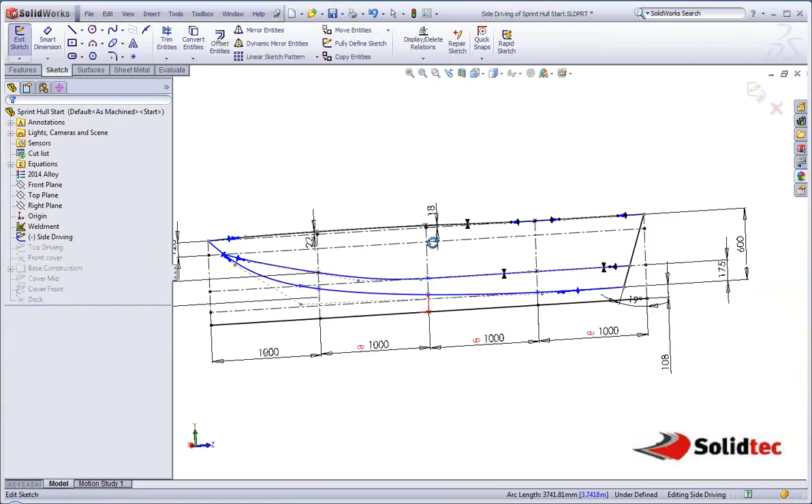This is going to be a short demonstration of how to build a jet boat using multi-body sheet metal. As you can see, I've already pre-drawn some sketches. I have one sketch that shows the side profile and the transition between the hull and the side, and a profile at the bottom that shows the plan view. These can be used to drive the entire structure once complete.

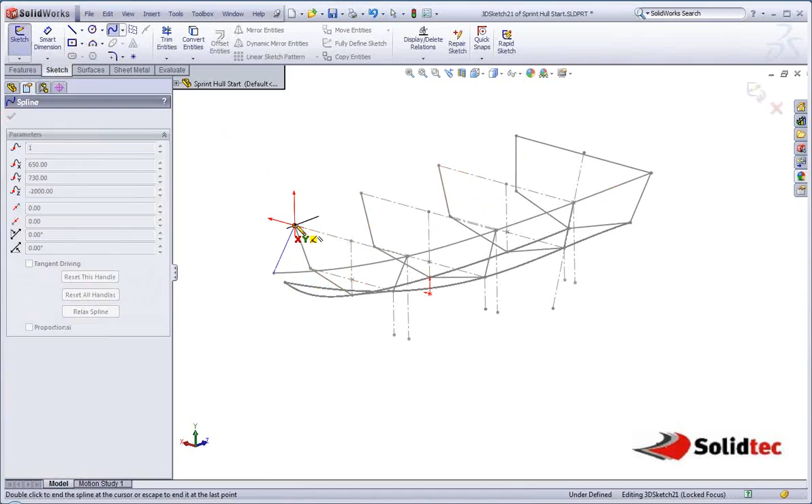These were used to create a series of other 2D sketches. As you can see, these intersect between the two points on the sketches, and a 3D sketch was drawn in the same fashion to link up the corners, which I'm going to do now, and the same through the side here. So very simple to create this type of geometry.

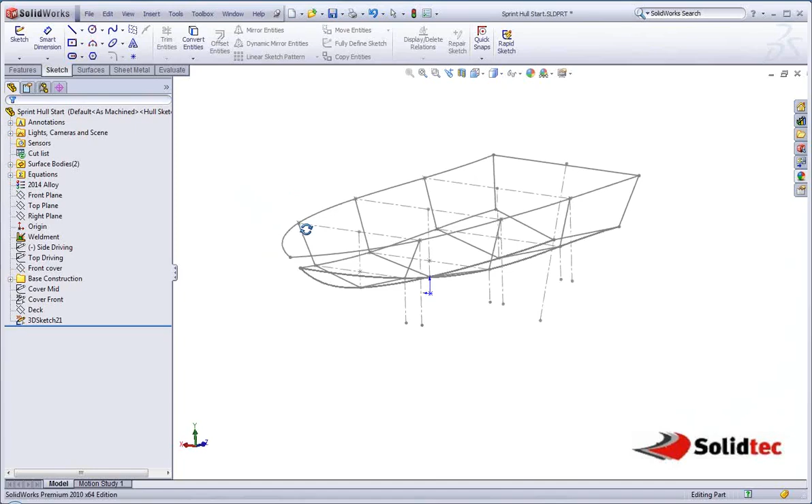The next thing we're going to use is to draw the sides of the boat. As you can see, because I've mirrored these, we don't necessarily need to use those, but we're going to draw with one half and mirror the features across, taking advantage of that symmetry.

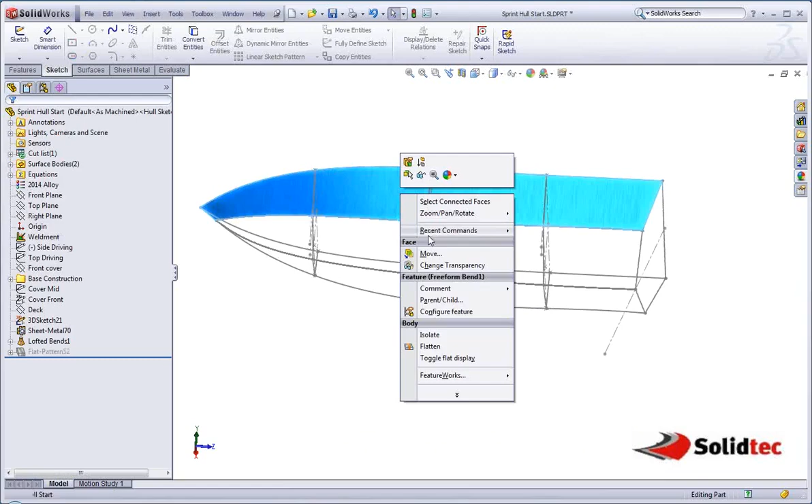And we're going to use a feature called lofted bends. What this lets us do is create a sheet metal part that can flatten complex curvature. As you can see, we get the side of the hull here, and we can right-click and flatten it at any point. We can see a full flat pattern and save that as a DXF for profile cutting.

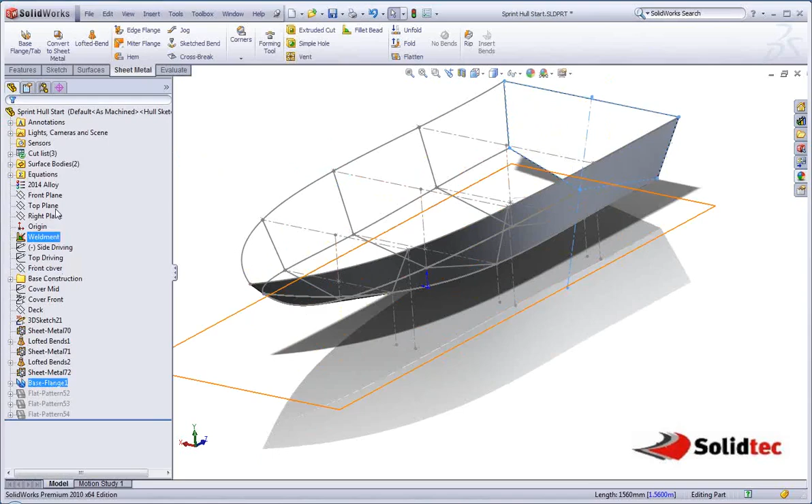We're going to use the same command again to get the hull done, and again we're going to put that on the outside. Then we're going to use a standard sheet metal command, base flange, 6mm for the transom at the back. As you can see, we're building up multiple bodies inside of a cut list, each with its own flat pattern, and we can flatten any of those at any time.

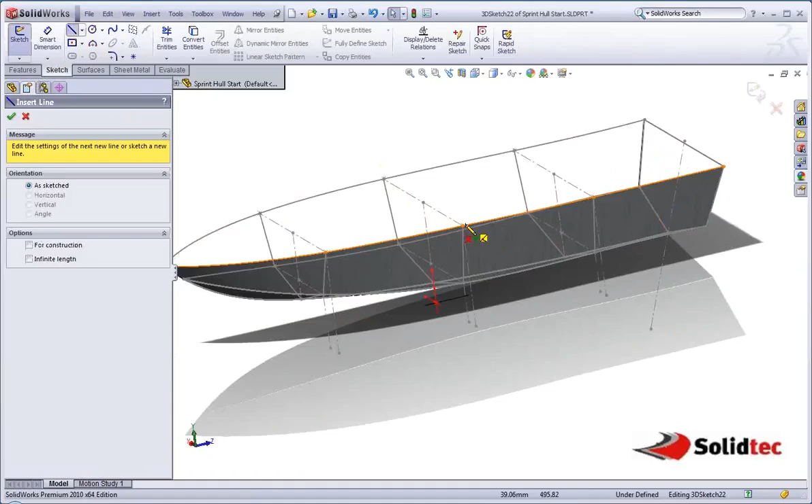Now we have that, what we're going to do next is draw the rim around the back. Before we go too far, I'm just going to create another 3D sketch, and this time we're going to connect that to the inside line here and to each of these points as we go around.

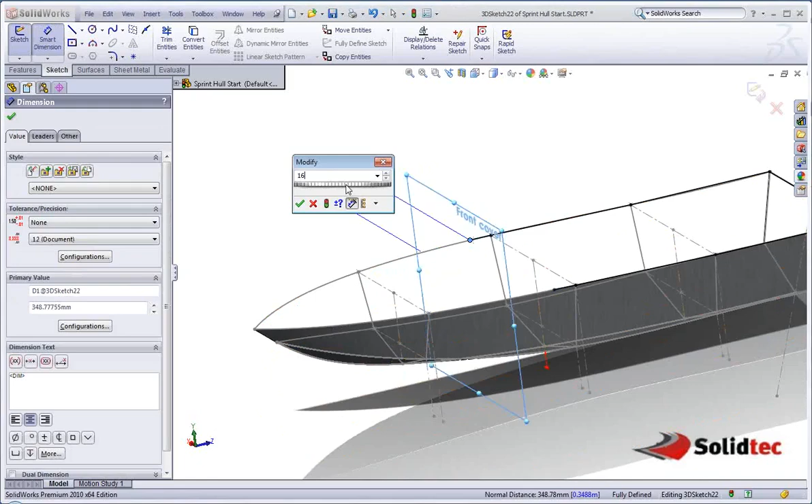And this one here, what we're going to do is actually select the mid-plane and say that it's symmetric about that right plane. One more thing, we're just going to dimension that to the front cover plane that we put in there, so we know how far back from the nose cover it's going to be.

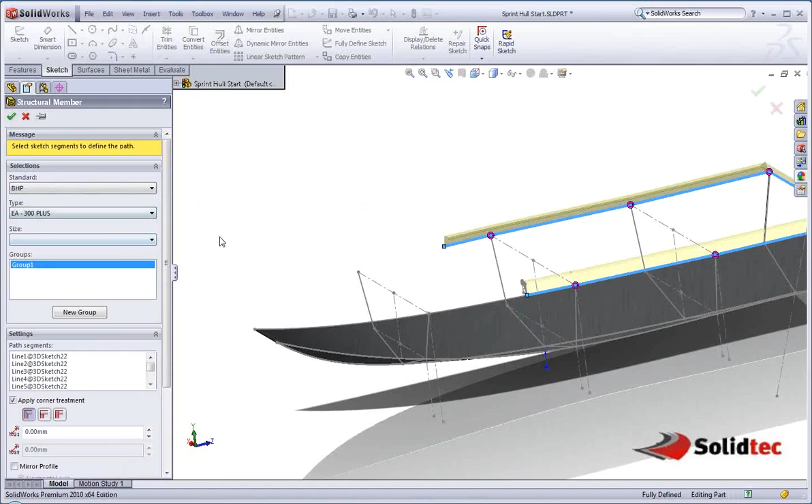I'm just going to hide that sketch we did, and we're going to select this chain, and we're going to use another tool called a structural member. This allows me to choose from a number of different standards, like circular hollow section, equal angle, any different size, like 200 by 200. Obviously that's an excessive side angle.

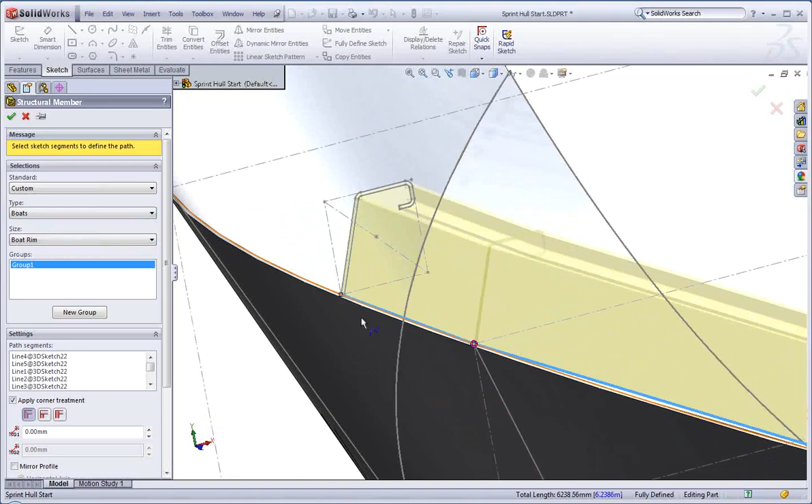I can rotate this, align it anywhere I want. What I've done is pre-drawn a profile and saved this in my boat library called a boat rim, and you can see here that it illustrates the shape of the rim. What we're going to do is click the locate button, and we can locate that on any point. Just pull this across, and I can locate it on any of these other points, rotate it, change it, choose how they join.

Do they butt weld? Do they mitre? And what we end up with is a series of structural members all the way around.

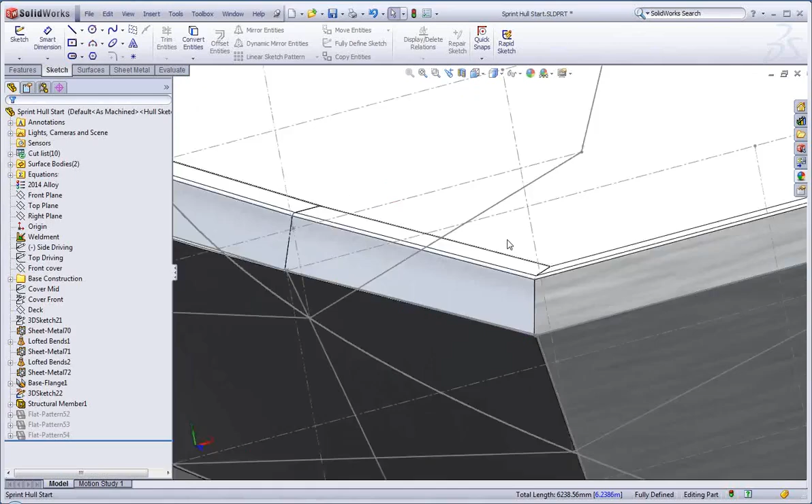Next, what we're going to do is the belting at the front of the boat. As you can see, what I've done, I've actually swept a surface that slowly rotates around through here. I did that so I could get this edge to include the later sketches from.

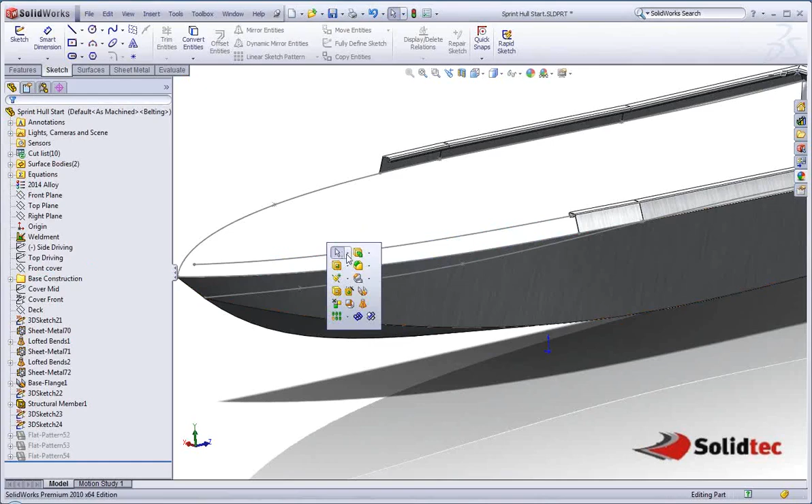But what we're going to do is use a command called face curves, and that lets me just put a couple of curves onto there. So again, I can use my lofted bend command to go between the two. Again, I'm going to make that on the outside, and this one's going to be 3mm, the same as the others.

Okay, so that's all my main bodies done. What we're going to do next is mirror those, taking advantage of the symmetry of the boat. I'm going to come down, use the right plane, and mirror. We could mirror all the bodies, but for best practice it's best to do one at a time, so I'm going to start with the hull.

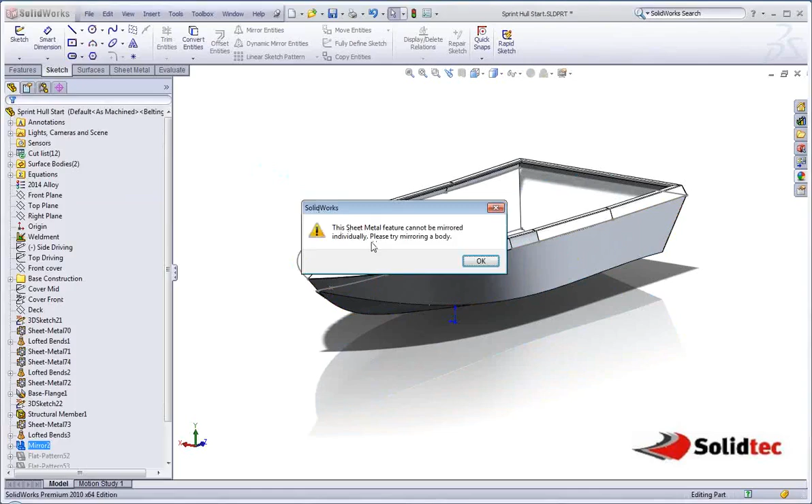Then we're going to redo that command, and we're going to do the side, and again for the belting.

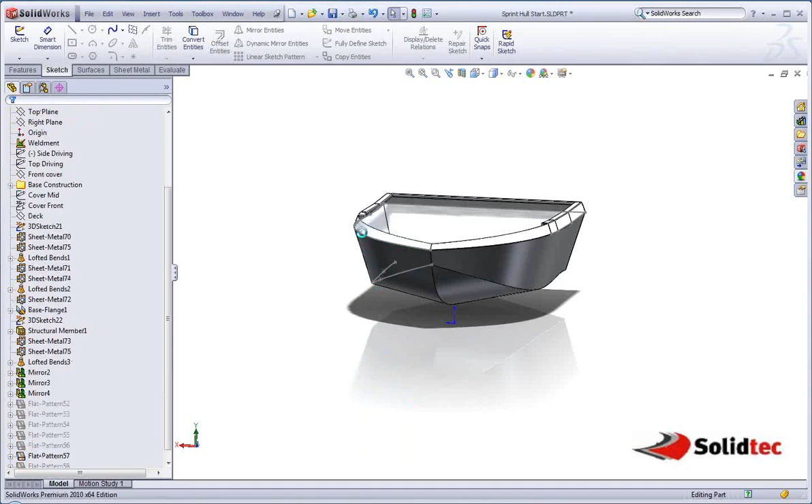Okay, so that's our boat starting to come together. As you can see, all of these are able to flatten. We can look at them in their flattened state, go through and check them, and they will update and change as we change the geometry later.

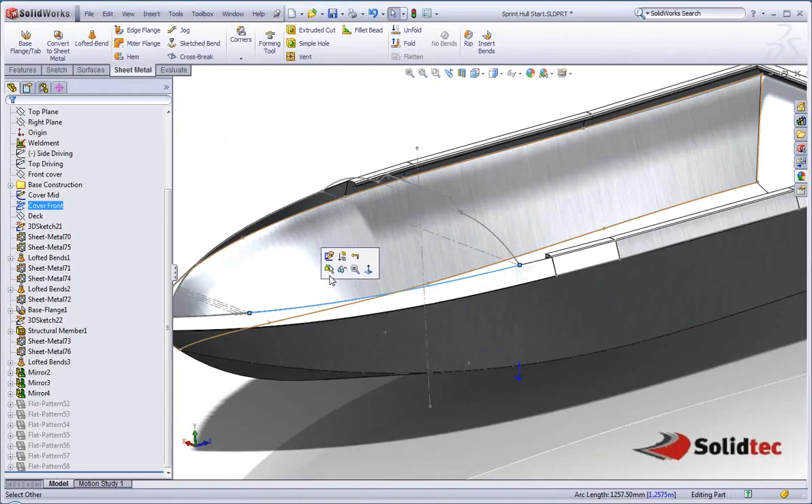So let's come through. What we're going to do next is the top nose cover. As you can see, I've pre-drawn this curve, and this sketch here is another 3D sketch. All I've done is included that edge from the swept surface I did, and done a few splits in there. This way I can control how this little kink comes down and where it joins at the nose, controlled using these dimensions here.

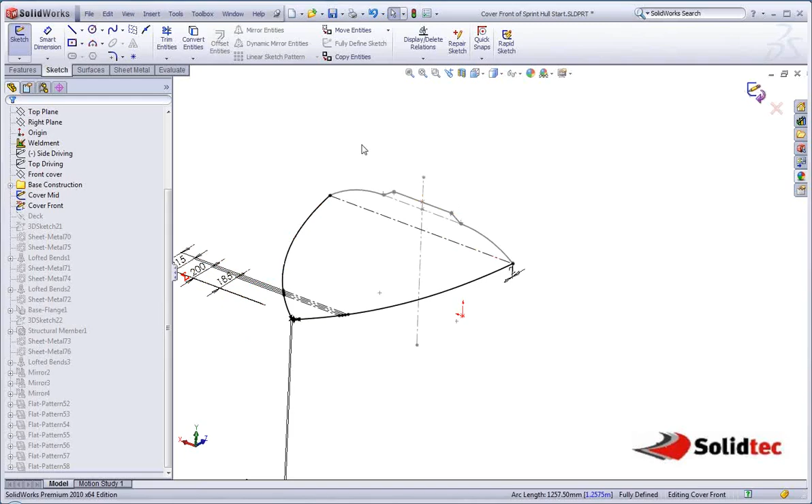Okay, so again our lofted bend command will allow us to loft between those complex forms. I'm going to put that on the outside, and that's done. So I'm just going to hide these sketches.

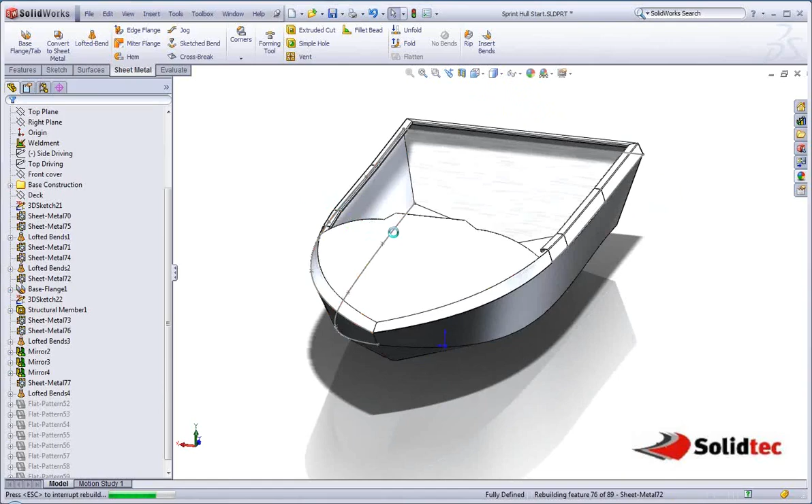Let's hide that one as well, and that one. So we're starting to get that form together quite quickly.

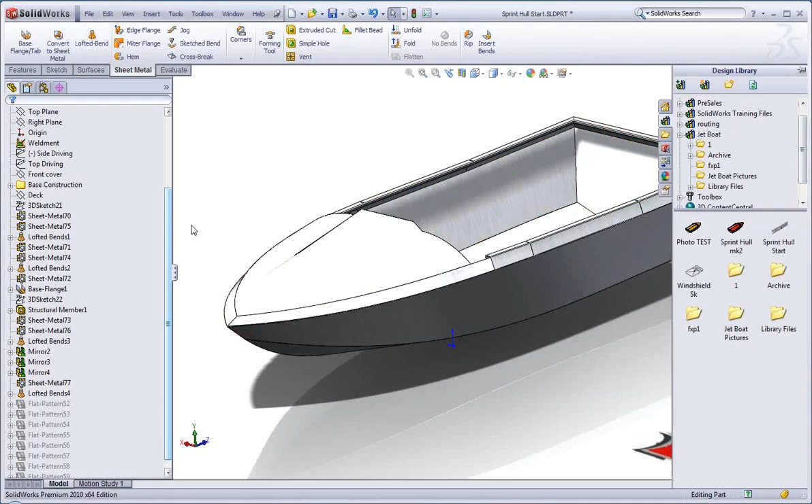What we're going to do next is the windshield. Instead of pre-drawing or drawing the sketches, I've saved those out into a library to show us how we can pull those in straight from the library. See on here that I've got a windshield sketch.

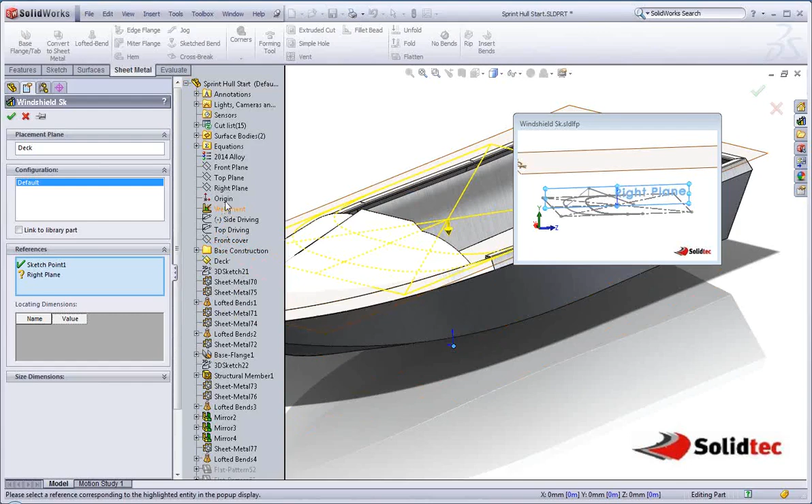I've saved a series of 3 different sketches that allow me to define where this windshield goes. What it's looking for is orientation of the point and my right plane, my center plane.

You can see what we get is a side profile showing the windshield, where it's going to be from the side on, and a top view of the windshield as well. And we're going to edit this sketch.

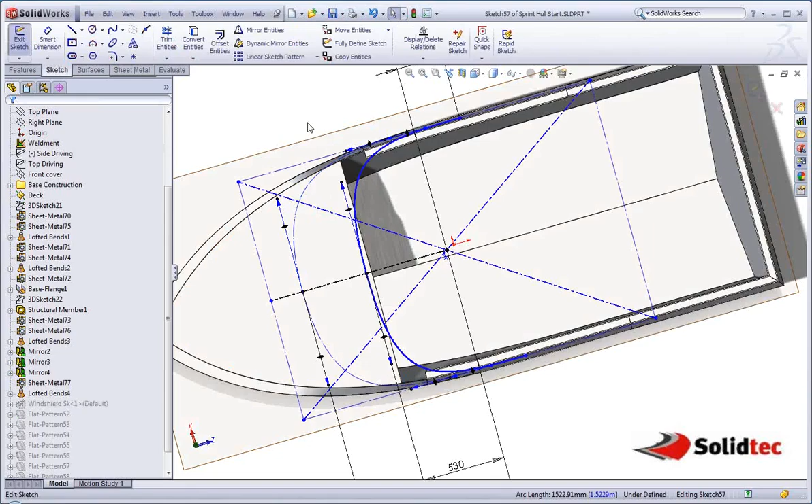We can see on here that it's not yet been defined, and we can pull that around and drag it and change it until it matches what we're after. Pop that on that point, and this looks pretty good to me of how we're going to do that.

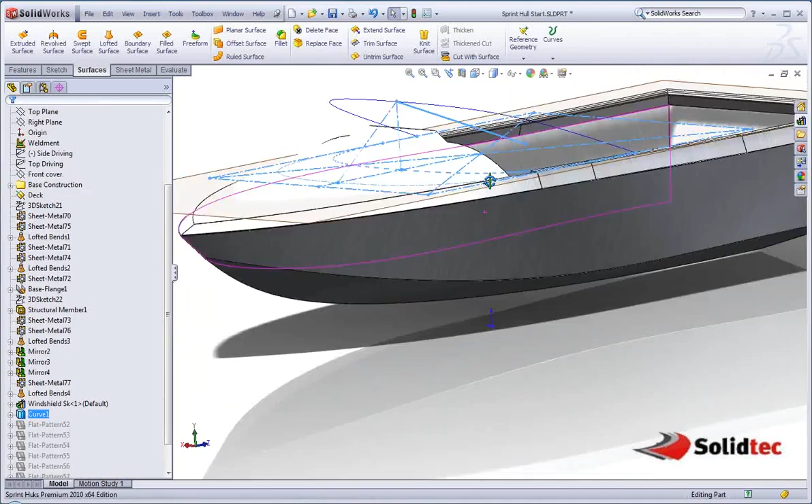Okay, so what we're going to do now - we have a top view and a side view of how we want the windshield to look - is use a tool called a project curve, and project this sketch onto this sketch. What we get is a 3D curve that shows where those intersect each other, from my side and top views.

As you'll see in the feature that we imported, I can show the bottom, and we can hide the other 2 sketches that we don't want. So we're left with a curve and a 3D sketch showing where we want, again, our lofted bends.

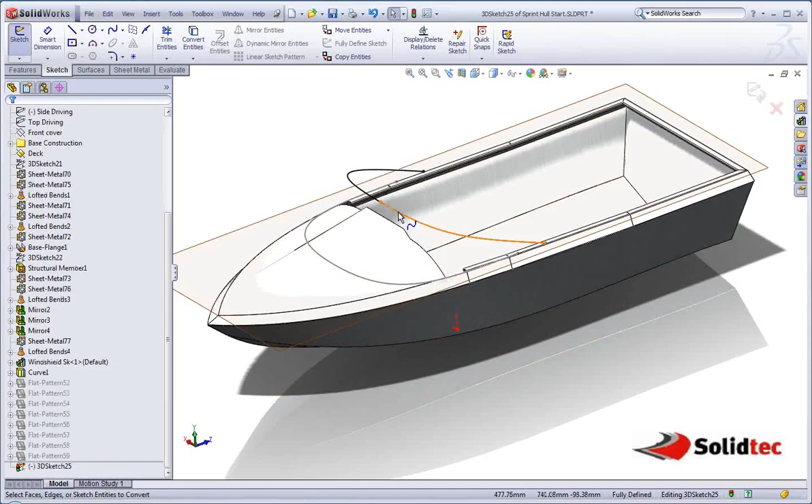So all that's left to do is create a 3-dimensional sketch. I'm going to include this particular line here, and as you can see, it's actually divided into 2 because of the way it was drawn. If I do my lofted bends from here, we'll end up with a line that shows that intersection point there on my geometry, and I don't want that.

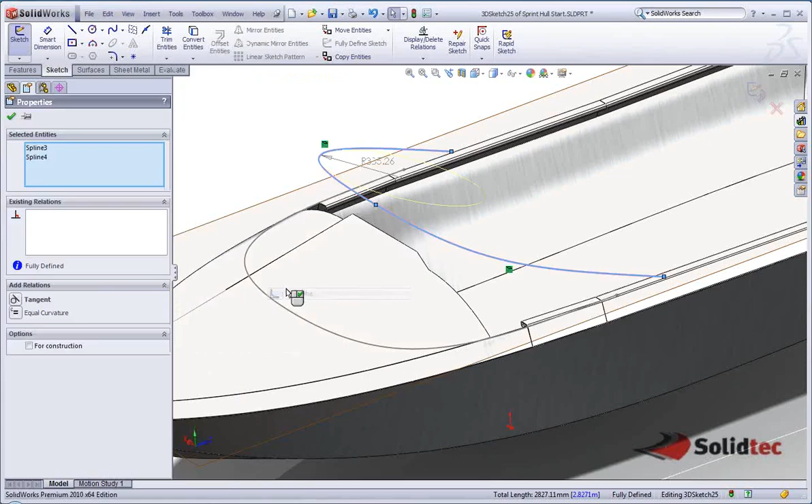So I'm going to use a little technique which is using something called a spline tool, a fit spline, and it will fit a perfectly smooth curve to those intersections.

Then I am free to use my lofted bend command between that sketch and this sketch. Again, I'm going to put that on the outside, and we end up with a flattenable windshield.

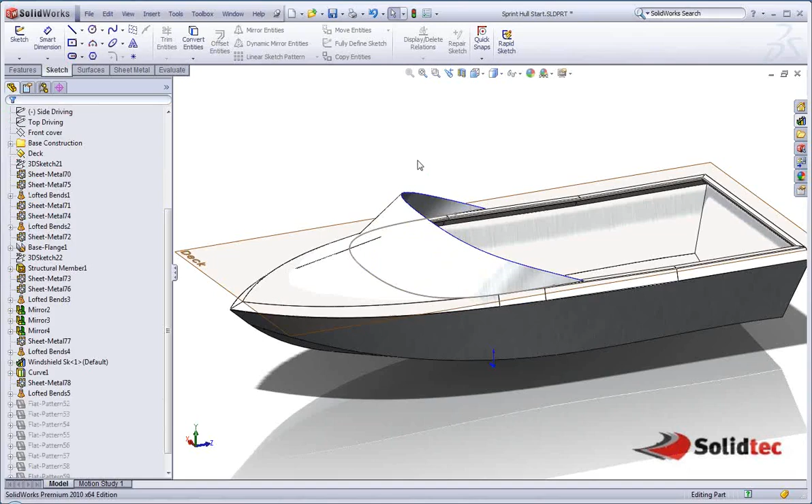Let's hide those sketches and that curve at the top. Okay, so you can see it actually penetrates through that top cover now. But what we want to do is, I'm just going to change the scene on here so it just looks a little bit easier on the eyes.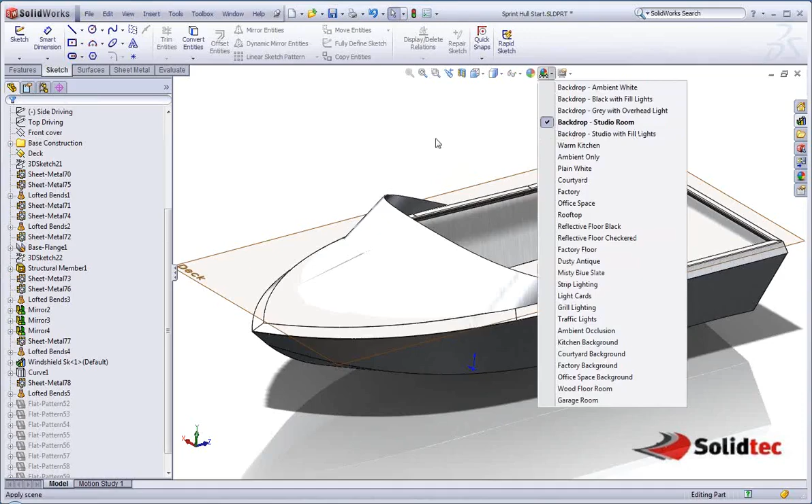You can see that we don't want it penetrating through here, so we're going to use another technique called intersection curves. I can say this surface and this surface, and what I want is a curve where they intersect each other, and that can be used to slice the bottom of the windshield off.

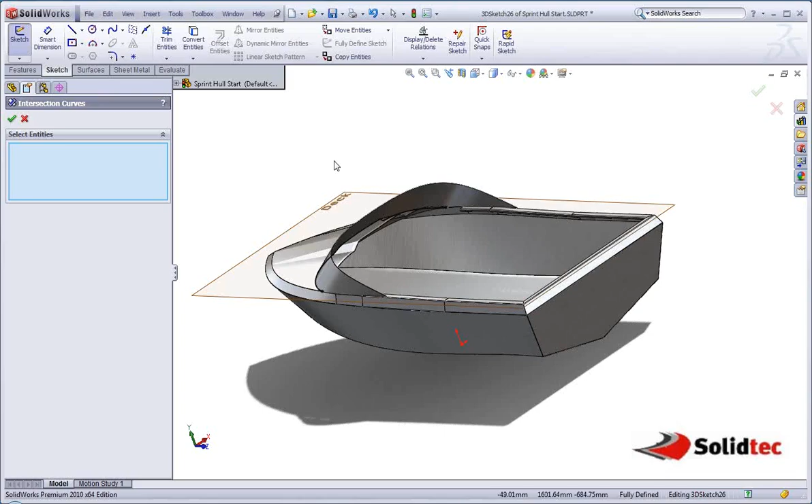Okay, so we end up with a curve like this, and all I need to do is add on there a couple of lines just to make sure that it cuts all the way through. And we're going to use an extrude cut, and we're going to cut away only the windshield.

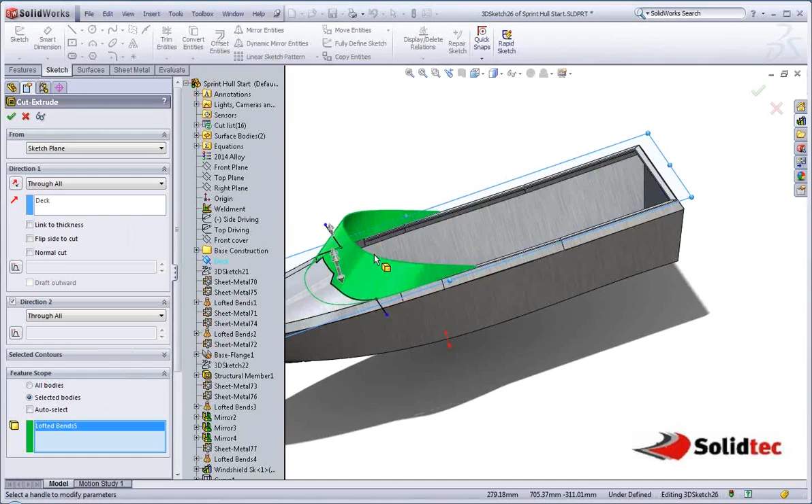Oops. Let me just come back in here and select that properly. Okay.

So what we end up with then is it fits perfectly in just on the top. So already profile to profile cut, we can see that the flat pattern of that works brilliantly.

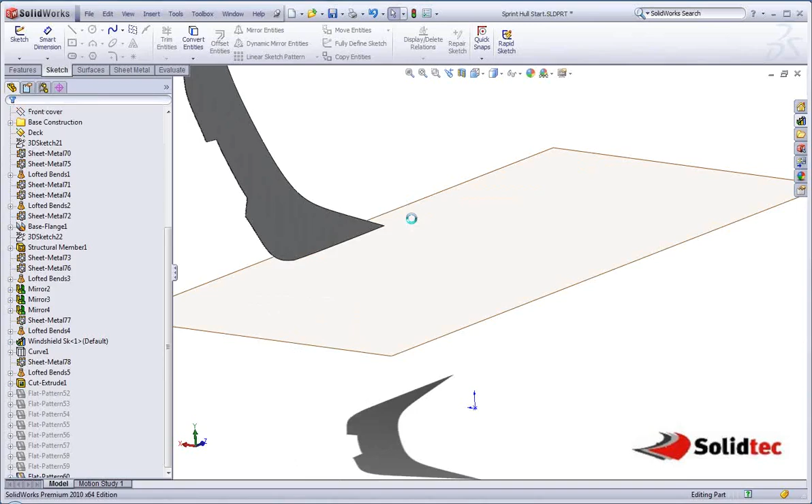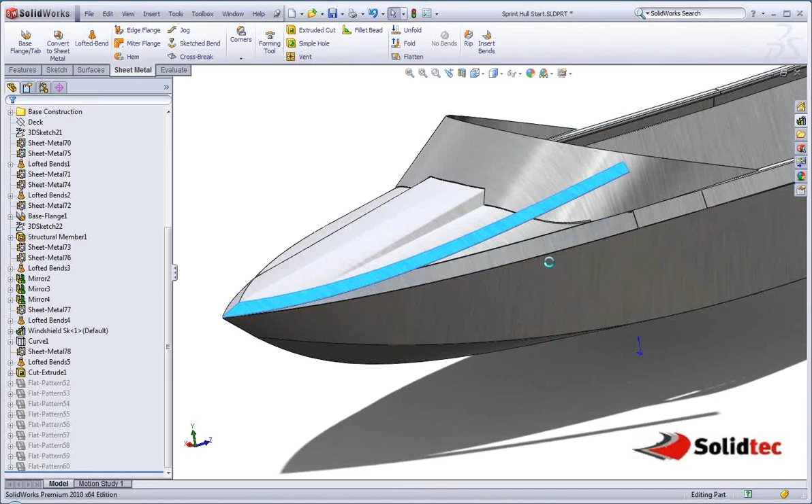And we can also work with these flat patterns in a state that's called toggle flat pattern display. This allows me to see what it looks like while we're working with it. So I can see potentially this would be how I weld this particular belting on. I'll start from here and slowly tack it round until it reached where I wanted.

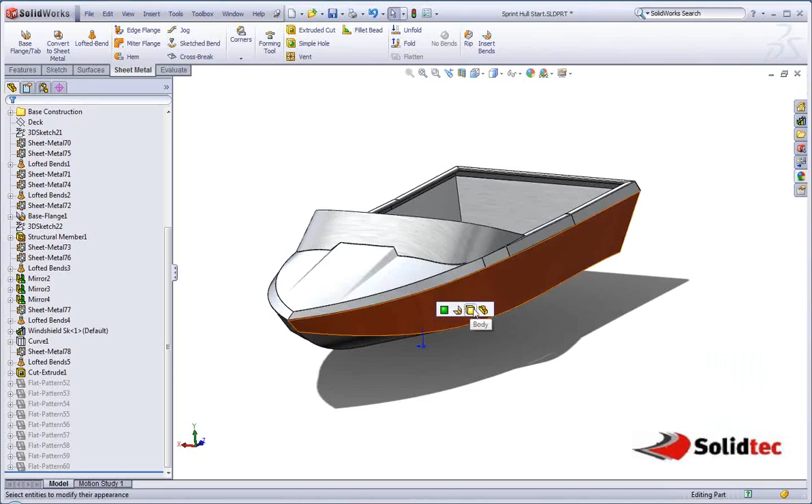Okay, I'm just going to add a couple of appearances to this, like a color to the whole body, and then maybe just this windshield can be black, and we end up with our boat. At this point we're going to save it.

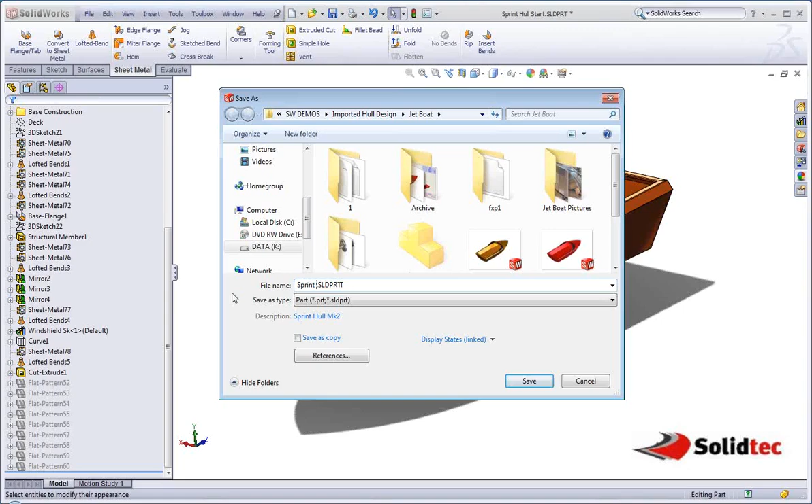I'm going to call it Sprint Hull Demo.

And we're going to do a couple of things. The first thing we're going to do is update our cut list, and we're just going to make sure that all the descriptions that we want come through to our model.

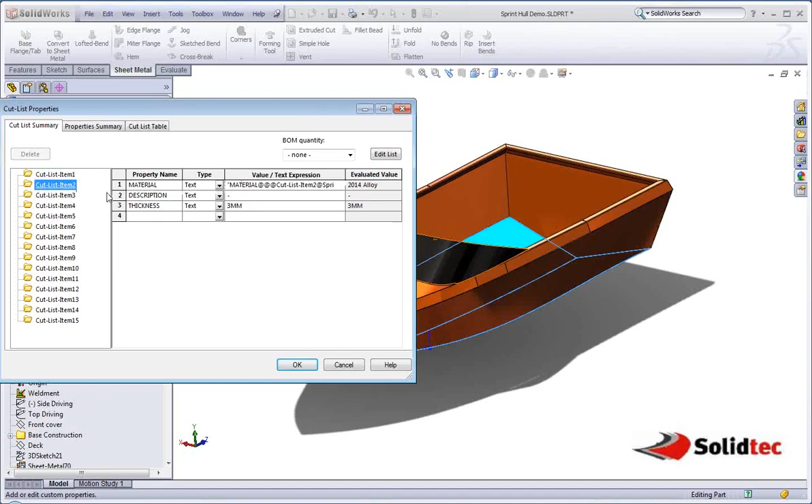So you'll see through here we've got each of the cut lists, so we can see our side in here, which is going to be side body, or port side even. I'll do it all in caps, port side. I'm pretty sure this one is going to be the port hull.

Transom, which is going to be 6 millimeters.

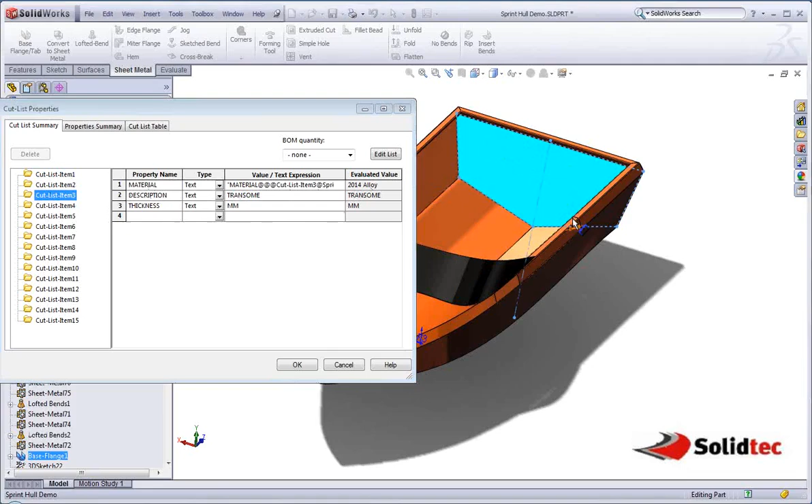And I'd like to note on here we can also get this to link to the thickness of our structure. That way when we update the thickness it will come through at the same time, and we'll see each of these comes through just fine.

Until we get down to our port belting. Starboard side. Oops. And our windshield.

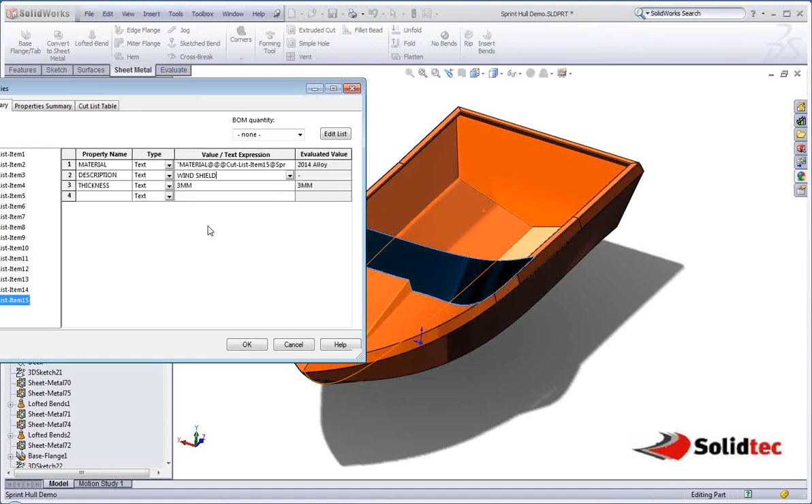Okay, so there we have our properties set up. That way when we put a cut list or a bill of materials in our drawing, they will come through automatically. What I'm going to do on top of that is we're just going to create a couple of configurations.

To make creation of flat patterns in the drawing a little simpler and easier, we're just going to do a port side and port hull, and I think maybe we'll just do the windshield as well, and one more, we'll just do that top cover. Okay, since those two go together.

And what we're going to do, we're going to take those and configure them to create some configurations. In there we're going to basically say I want a port side, a port hull, a top cover, and a windshield.

Okay, and in there all we need to do is say, well, these are going to be suppressed for these particular configurations.

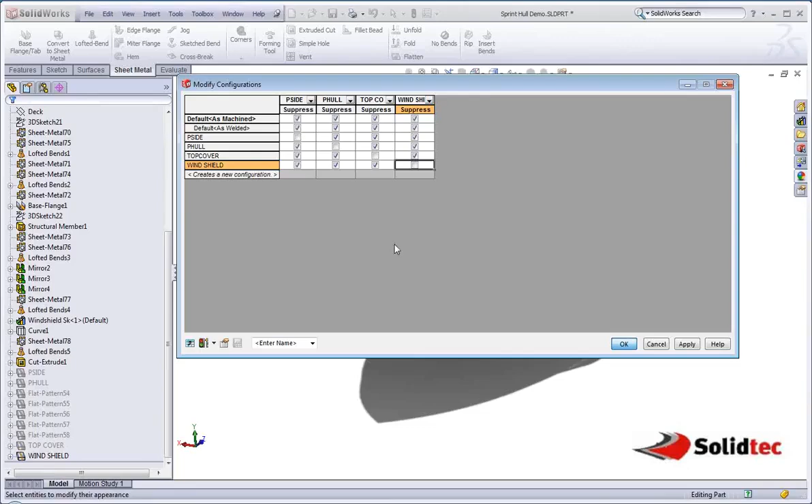As you can see, what we've done, we've built a configuration that shows the flat pattern for each of those particular components. So there's our hull, you can see we've made flat, our port side, our top cover, and our windshield.

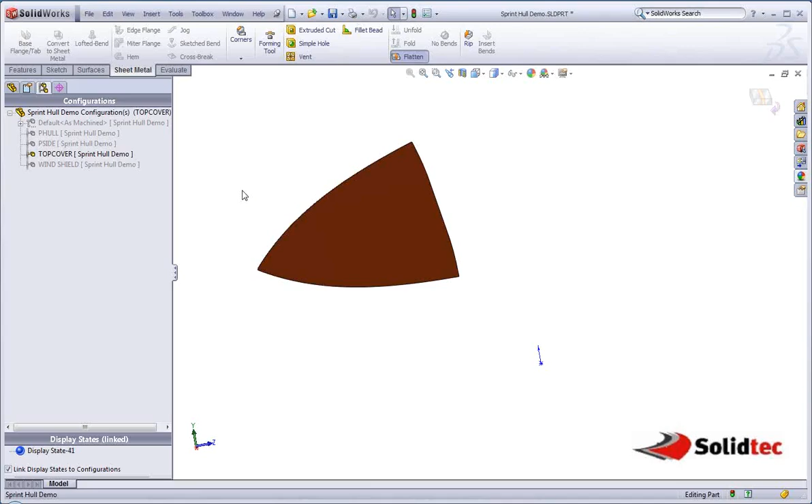Okay, so going back to the main configuration, we're going to build the drawing briefly, and then what we'll do is we'll just modify a few sizes and show how that's completely parametrically related to those initial sketches.

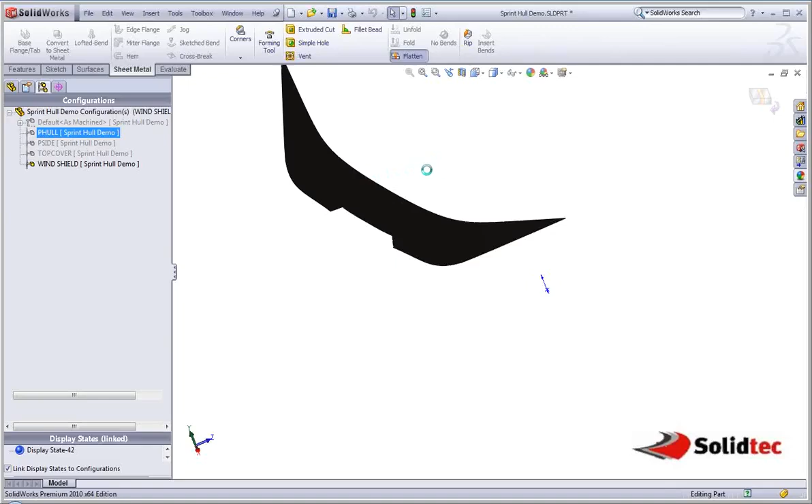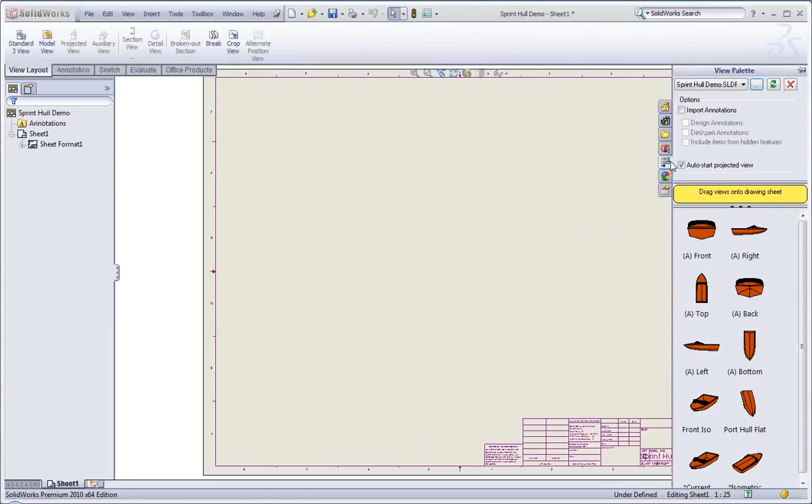Okay, let me just put that windshield back on. Okay, so we're going to make a new drawing. It's very quick, very easy. We'll see all the views that are available to us over on the right.

We can just choose to drag and drop them in, choose how we want them to look, do we want them shaded or whatever. I'm going to put a right view down here, project a top view and a front view, and that's probably enough views for that particular model.

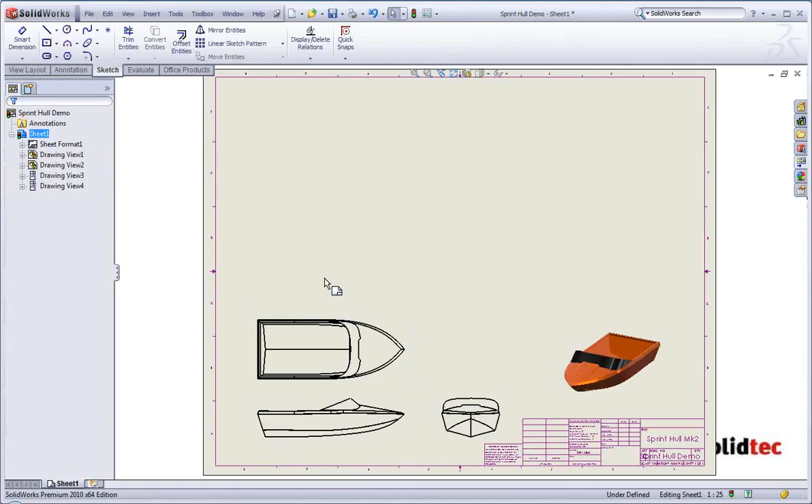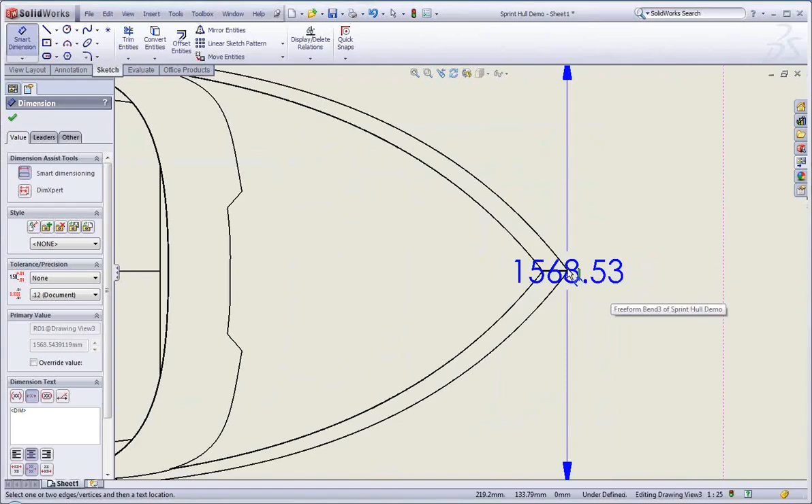We're going to add a few quick dimensions on there. Let me just zoom in. One on the side, so the width of the structure. I'm going to have one for the overall length. Oops, let me do that one again.

Just put that on the bottom, and one for the overall height as well. That's probably enough, and we're just going to change those dimensions so they have 0 decimal places, which makes it a little cleaner.

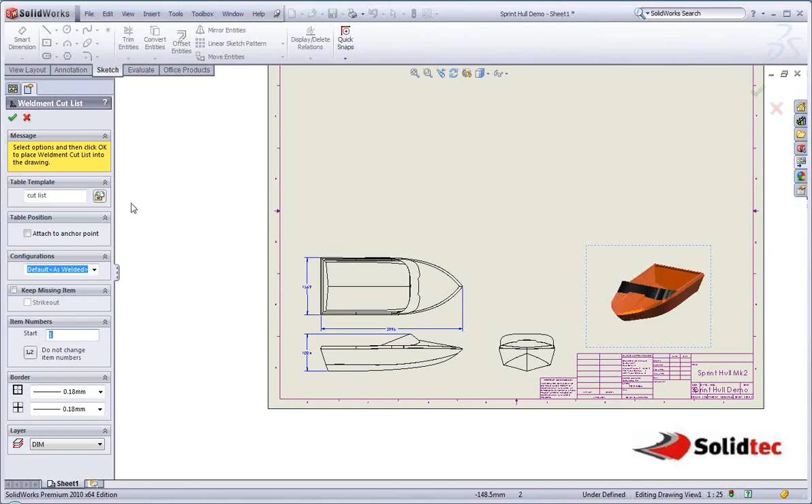Okay, we're going to add a cut list on here. We're going to use just a standard cut list, Weldment cut list, and I'm going to use the default template. We can see that all the descriptions and lengths of those structural members all come out on my cut list, they're all labeled with quantities and numbers.

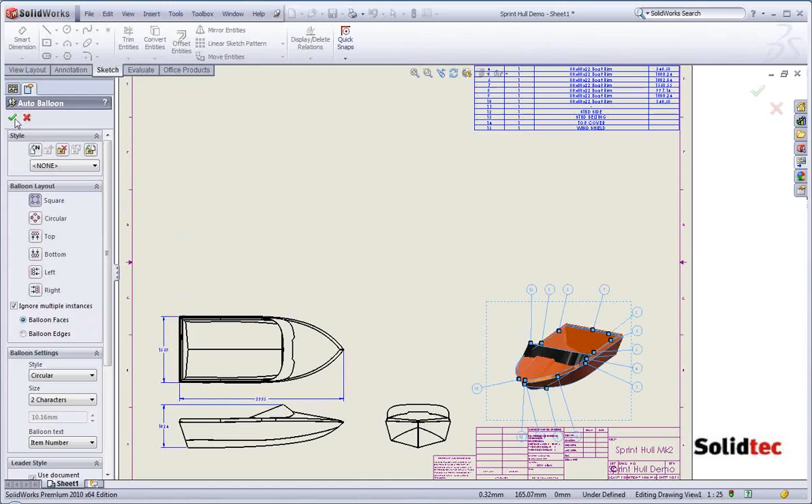And we're going to add some balloons. Auto balloon this, just move them around so they look a little cleaner, maybe add them to the faces. That looks good, just move the whole thing up.

The only thing left to do is add some flat patterns. So we're going to use standard model view, and we're going to choose to add them, one for the port hull, and we can add those straight in flat pattern state. So we're just going to come down here and say flat pattern.

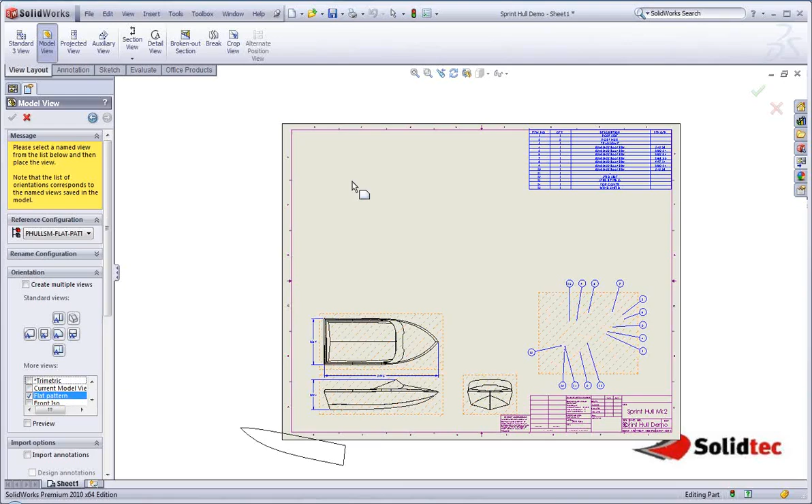And that's one hull on there, and if we don't like its position, we can easily rotate that and align it where we want. Maybe we want to do that for nesting.

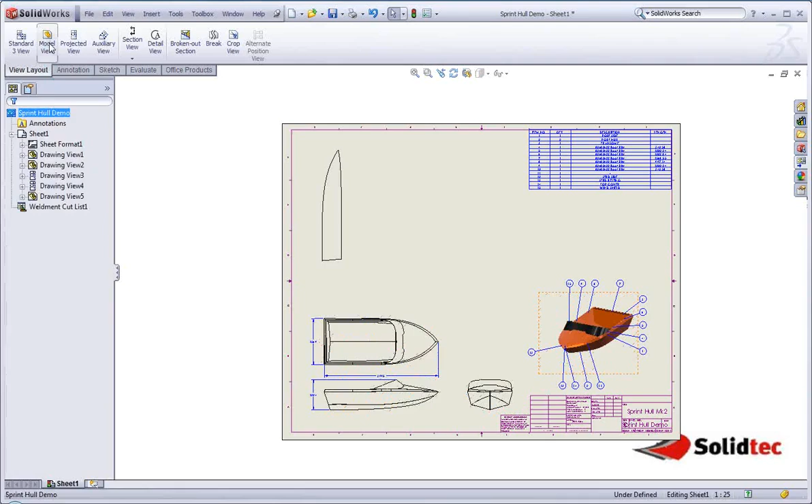We're going to add on, maybe we'll just add on two others. So we're going to say I want another drawing view, which is going to be the top cover. And the last one we're going to do, which is going to be the windshield, and then we're done.

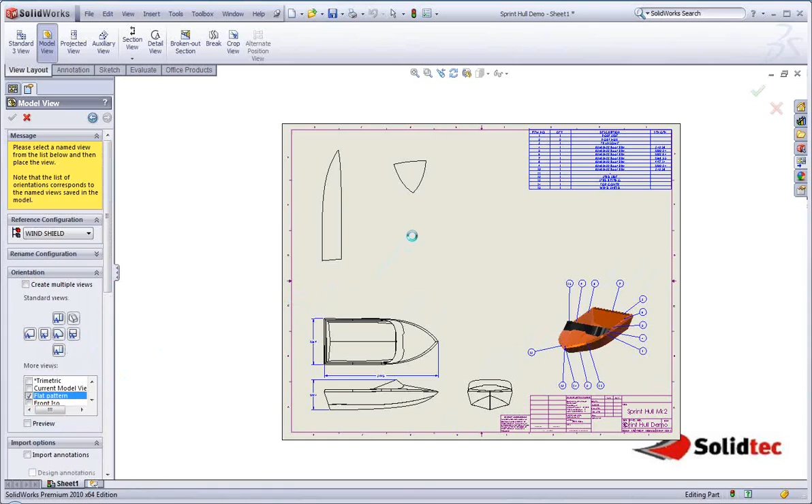And we'll make some changes and see how that updates. Let that rebuild, and we're done.

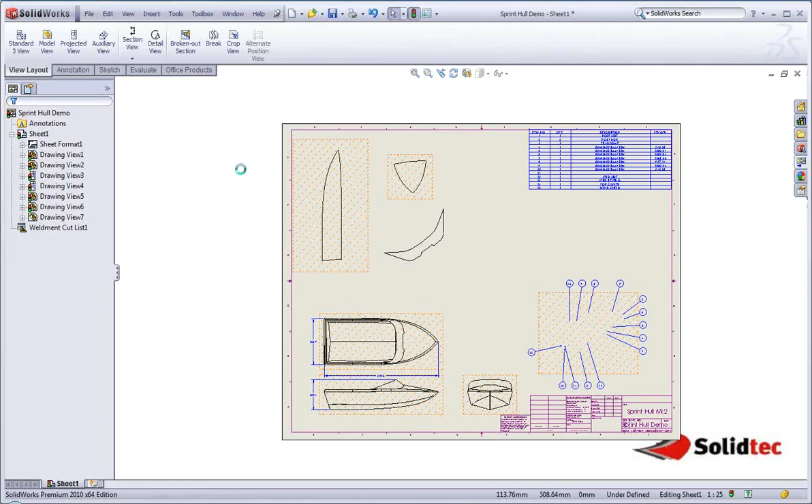Okay, so we have our flat patterns and our drawings for that particular boat. So coming back in here, what you'll be able to see is that we can use any of those driving sketches to make some amendments and changes. And potentially this would be the point where we started, starting with an existing design and making a new size of boat based on the same type of construction.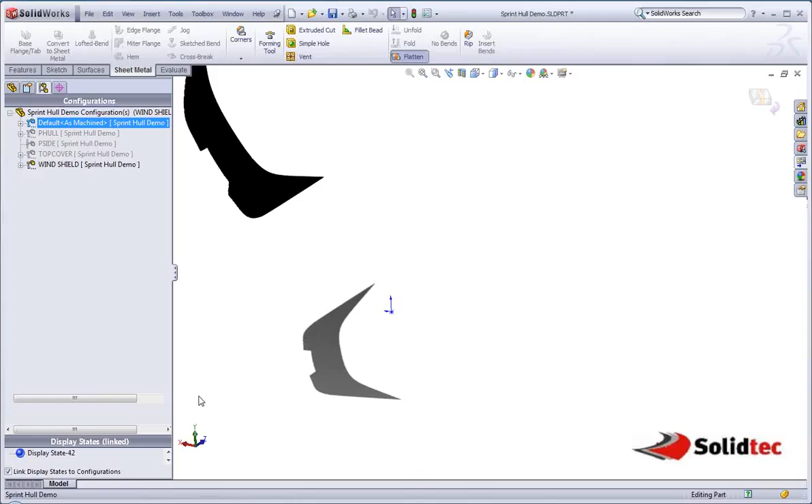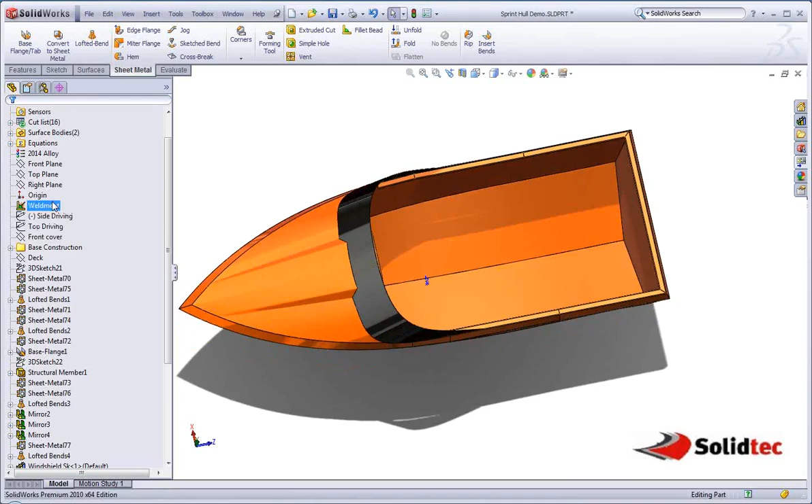Okay, so maybe what we'll do is we'll go into those original sketches, like the side driving sketch. We can make that, give it a longer tip, maybe 1300. A longer tip. Maybe what we'll do is go to the top driving sketch, make the whole thing a little wider, maybe 1700.

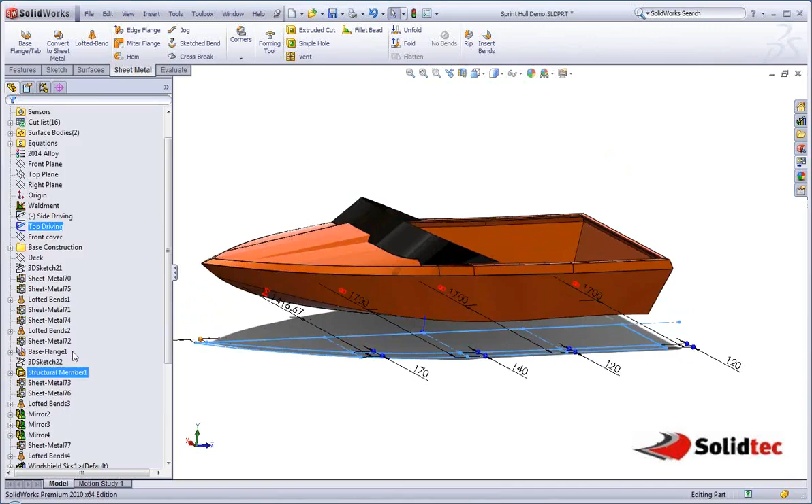Just make sure that that sketch was attached. I think I didn't attach it very well, so just go back in there. And what I forgot to do was give it a particular length to control that with. So what we're going to do is just add that dimension right on now.

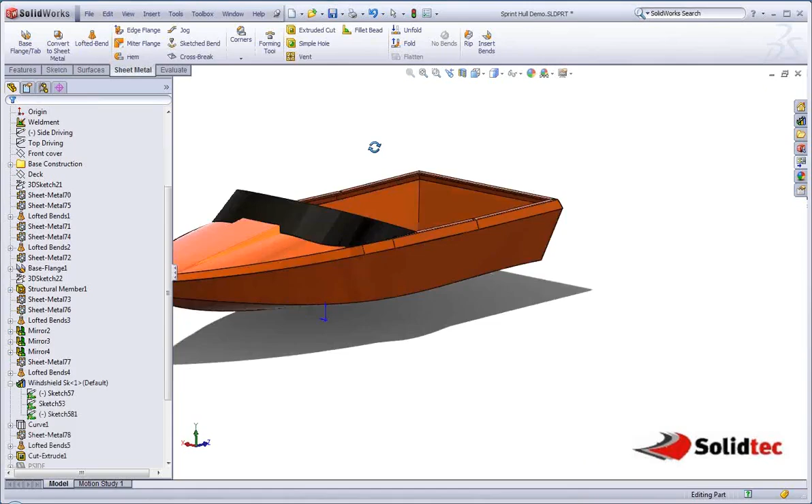Okay, so we've made the nose longer, we've made it a little bit wider. What else can we do? We can also come in here and say, well, what I really wanted to do was make this bonnet come up 100 mil rather than just 50 mil.

See how that comes up? It looks pretty ugly, so I'm going to bring that back down to 80. Maybe what we'll do is make that a little bit wider as well. So there's a lot of control over there.

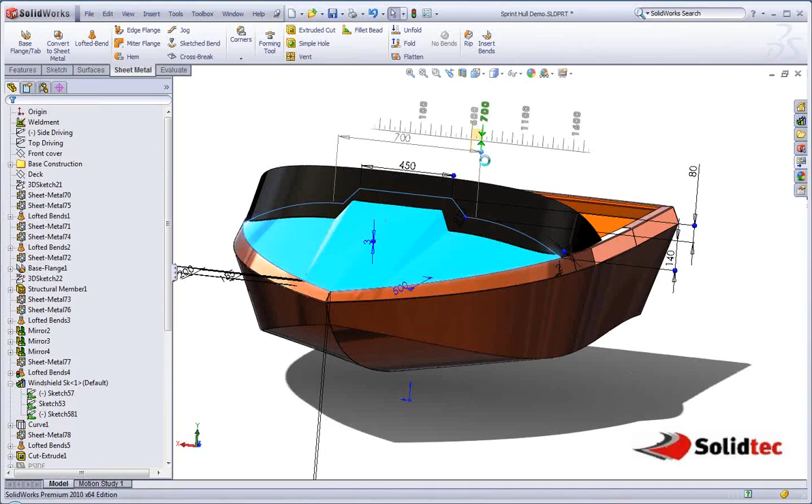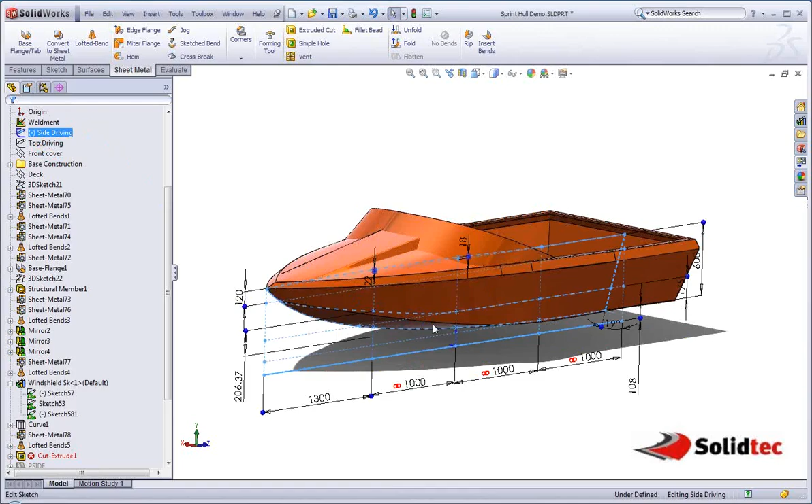It doesn't look quite as good as I'd hoped either, so I'm going to undo that and just leave it like it was. But we can change any aspect of that, including, if we want to, we could actually go right into the sketch, not control it with dimensions, but actually drag and change it, and say, well, what I was really interested in was making some transitional changes to the way this hull comes up.

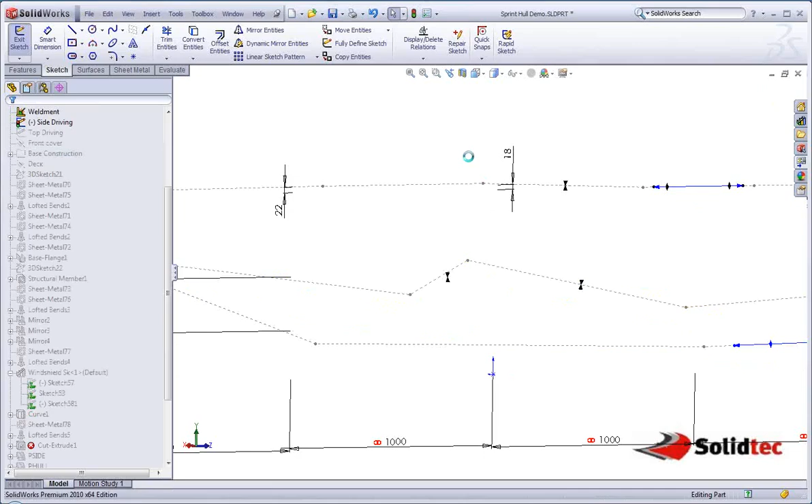Maybe if we make a wacky one just to illustrate the point. Let me pull that up at this side. So that concludes the end of the demonstration.